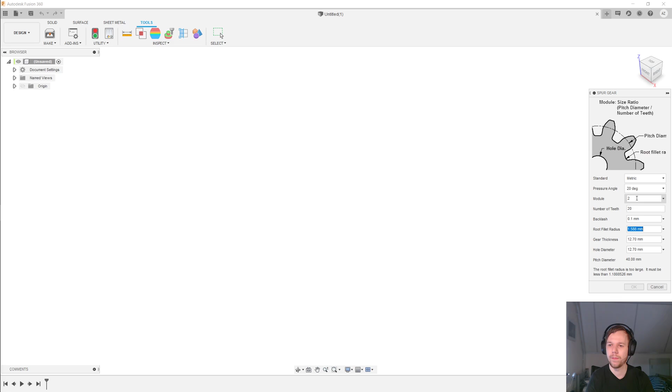Hi, in today's video I would like to talk about helical and herringbone gears. And to start, I'm first going to create a regular spur gear. So you've seen how to do this before. And there we have a spur gear.

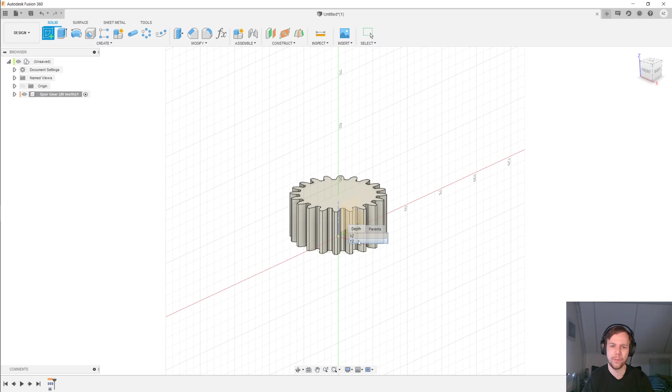I'll now activate the new component that I've got. I'm going to create a sketch, and I'm going to put that sketch on one of these two upright planes. And if you're having trouble selecting them, you can left click and hold, and then this dialog pops up and you can easily select either of the two. I hit P for project, and I project the top plane of the gear into my sketch. Reset the view via the view cube.

L for line, and I'm just going to draw a line floating out here. I'm going to take the end point of the line and make that coincident with the projected line. And I'm also going to make the line itself coincident with the origin. Now, you could have made a midpoint constraint as well, but because this projected line consists of all these line elements, you may end up having your line slightly off kilter. The final thing is D for dimension, and I'm going to make this gear 20 millimeters tall.

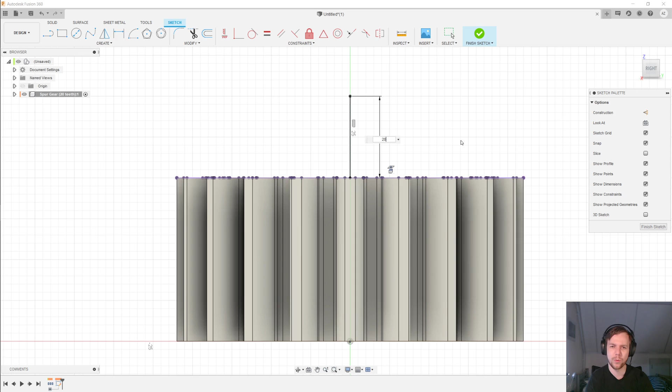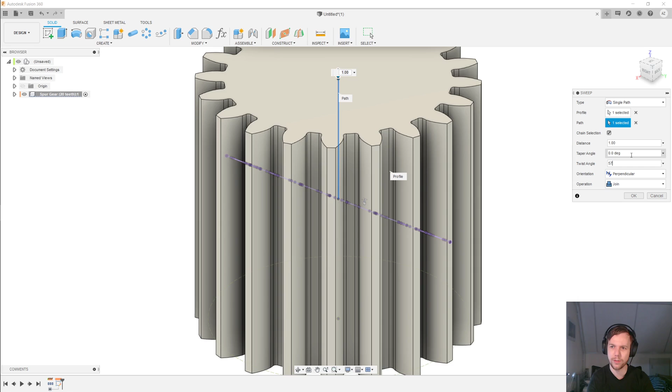Finish the sketch. And then under Create, we go to Sweep. The profile is the face of this gear. The path is the line that we made. And then under the twist angle, we are going to enter 57.296 degrees. And I'll explain where that angle comes from later. And then under the operation, we are going to select New Body.

And then click OK. And then if you open up the component here, you can see these two bodies. And so we can take the original body and remove it. And there we have a helical gear. From here you can use all of the techniques that I've showed you in video 1 to attach this gear to a shaft. And you can use all the mathematics from video 2 without any changes.

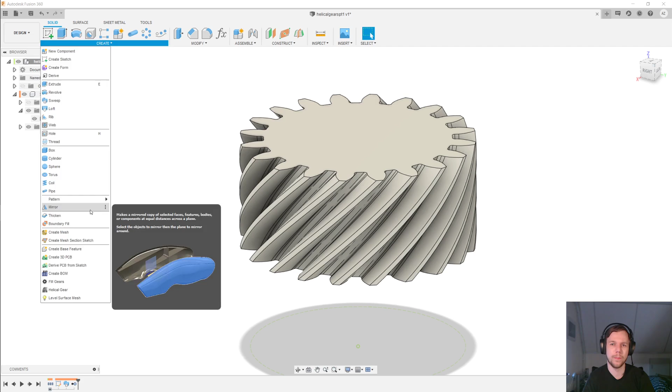What I'd like to do now is turn this gear into a herringbone gear. And to do that, we will go to Create, Mirror. We are going to mirror a body, specifically this one, and we are going to mirror it across the top face of the gear. And then click OK. And there we have basically a herringbone gear.

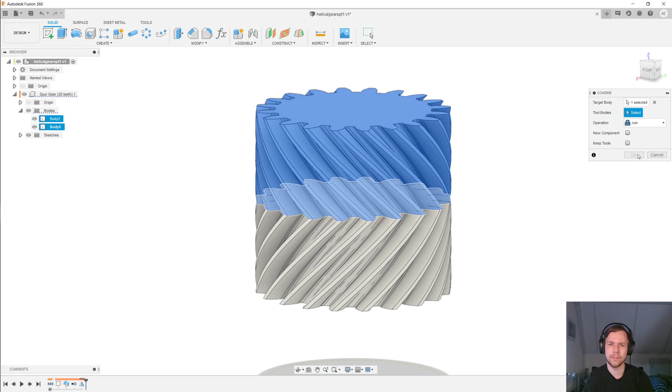But if I look now under my component, I see that I have two bodies. So I'm going to Modify, Combine, click both of the bodies. And once this is computed, that will join them up, Operation Join, into a single body, and that completes the herringbone gear. And this is in general a very convenient way of making symmetric objects. You just make one half and then you mirror it across a flat face to make the other half.

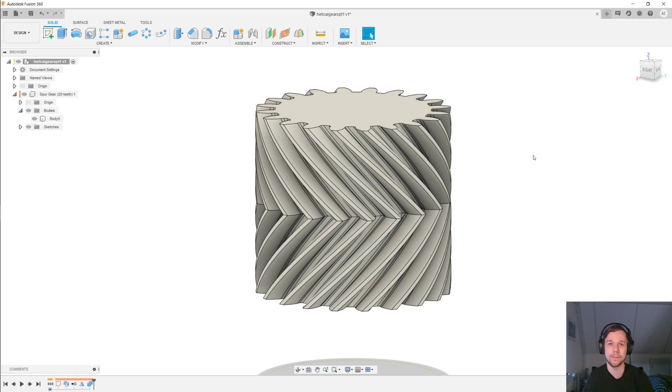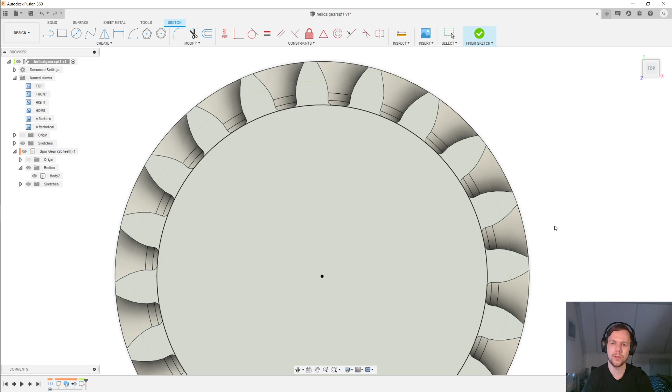I want to go back a few steps and show you something different. So I'll select the Combine and Mirror on the timeline and press Delete. And what I'll do now is create a sketch on the top surface of the gear, C for circle, and I'm going to make this circle as large as the inner diameter of the gear. Finish the sketch, E for extrude, and let's pull this up by 10 millimeters.

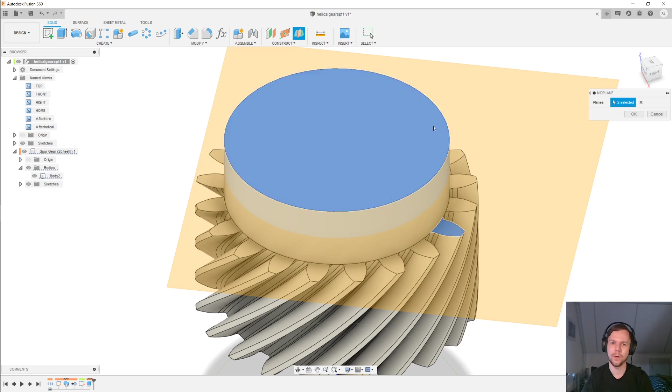And then I'm going to construct midplane, which I use so often that I have it pinned to my bar. And I'm going to put it between the end of the helical gear and the top of this cylinder. Click OK. Then Create, Mirror, as before. I'm going to take this body and mirror it across the plane that we just made. And then Modify, Combine, as before, the two bodies. Join them and click OK.

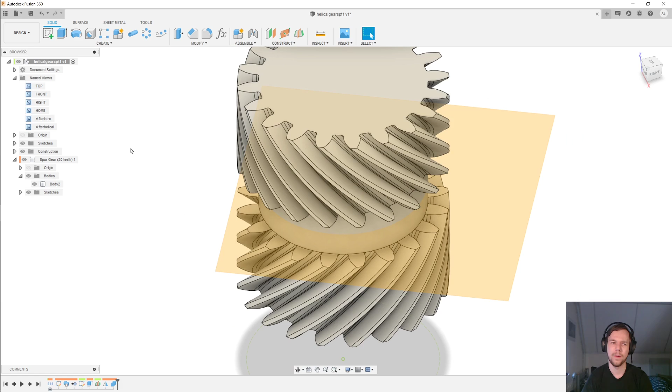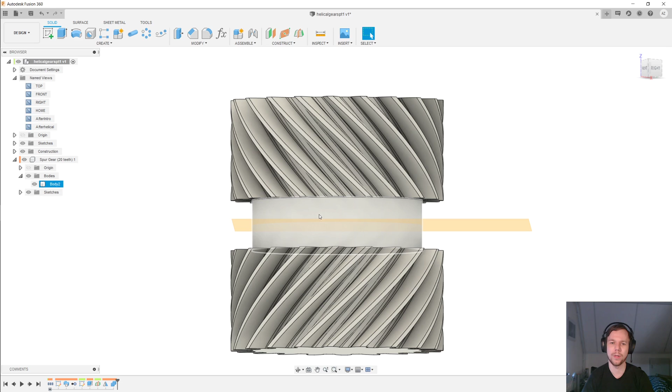And so this is basically the same thing as we had a moment ago. But instead of the two helical gears really meeting tip to tip at the center, there is this space in between. And this is known as a double helical gear. And I'll go into the reasons why you would want a double helical gear instead of a herringbone gear later on. Let's first take a look at that angle that we put in the sweep command.

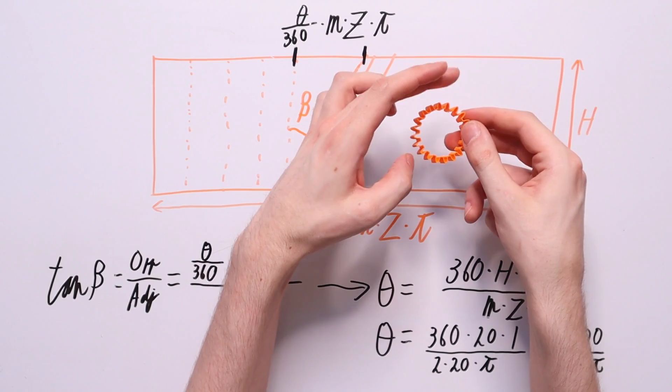Imagine you take a gear like this and you cut it open and then you lay it flat like this. What you then have is a rectangle, and the long end is equal to the diameter times pi, the circumference of the circle.

And in this case, it's specifically the pitch diameter times pi, which is also equal to the module times the number of teeth times pi. In a regular spur gear, the teeth would go upright like this, but in a helical gear, they will go off at an angle. And that angle between the helical teeth and upright is beta, which is the helix angle.

Now, these helical teeth cover a horizontal distance, and that horizontal distance is equal to this expression over here. So it's theta over 360 degrees, and theta is that angle that we put into the sweep command. And this part essentially represents how much of a complete revolution the sweep has turned. And then these three numbers are simply the circumference of the circle. So it is how much of a complete revolution have you made times how long is a complete revolution.

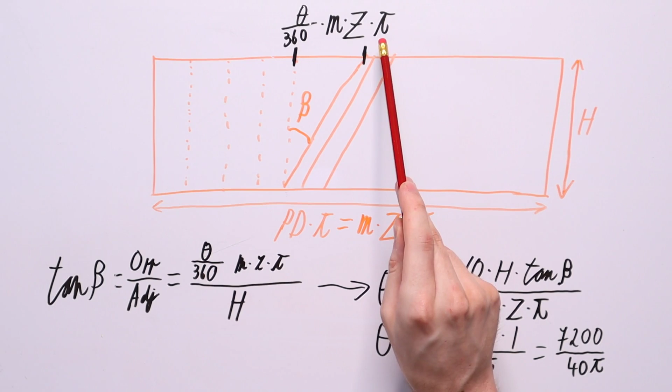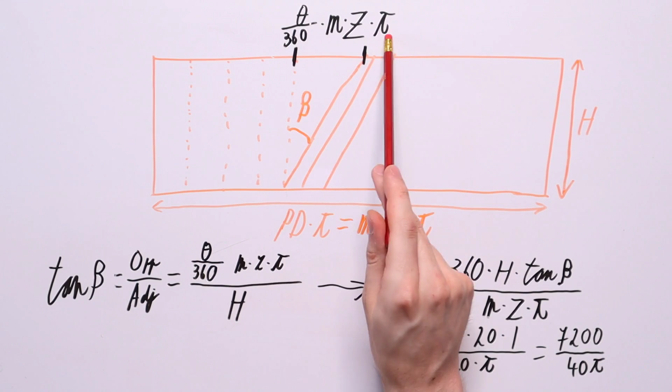So if you remember your high school trigonometry, you will know that the tangent of beta is the opposite divided by the adjacent, which is this expression over here, this horizontal bit, divided by the vertical bit, which is simply the height of the gear. But this gives us beta if we know what we put into the sweep command, but we want that the other way around, so we need to rewrite this.

This is fairly straightforward. You multiply both sides by h and by 360, and you divide by module, number of teeth and pi. And what you get is that theta is equal to 360 times h times the tangent of the helix angle divided by module, number of teeth and pi.

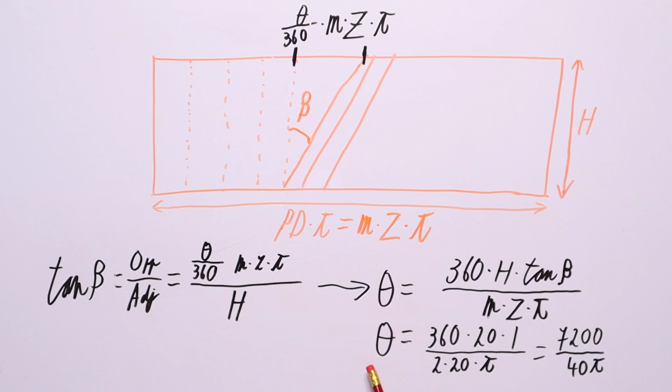And in the specific example that I did a moment ago in Fusion 360, I had a helix angle of 45 degrees, and the tangent of 45 is 1. So we get 360 times 20 times 1 divided by 2 times 20 times pi. And that is equal to 7200 divided by 40 pi, which is a little bit less than 60, aka that 57 and a little bit degrees that we put in. So that is how you get the correct helix angle, or rather what you need to put into the sweep command to get the helix angle that you want.

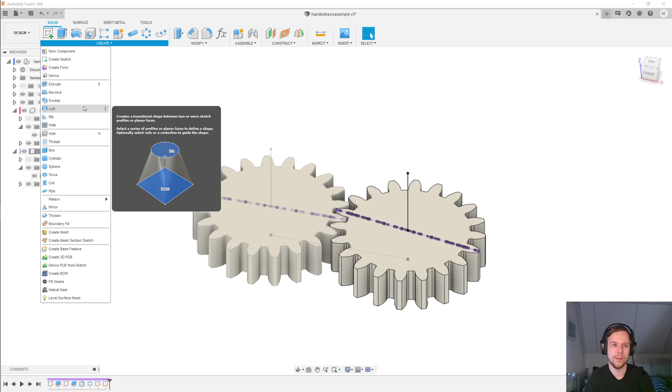I've so far entered only positive values for the twist angle in the sweep command, but you can also enter negative values. So I'll activate this component here on the right, and then create, sweep, and then I'll sweep it the same way as before with a positive twist angle of 57.296 degrees. And as before, the operation will be new body.

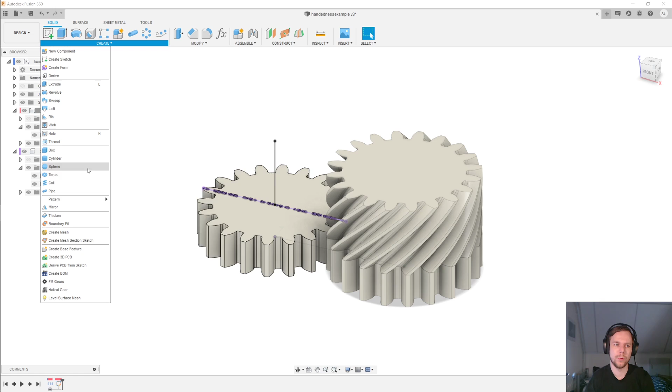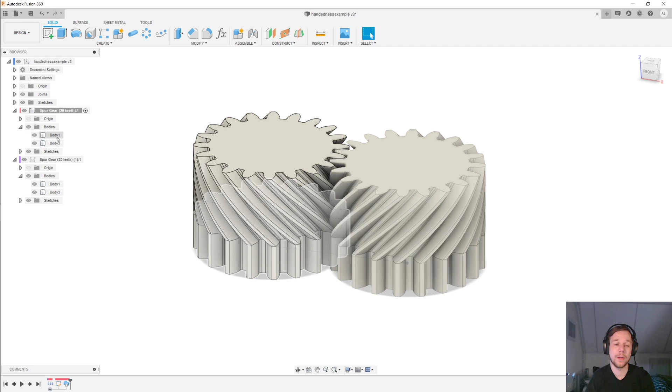And then on the other gear, I will do the same kind of sweep, but this time I will give it an angle of negative 57.296. And again, for the operation we'll do new body. And then as before, I can remove the old bodies that were the spur gears themselves. And I've set up motion links between these components so that they rotate together.

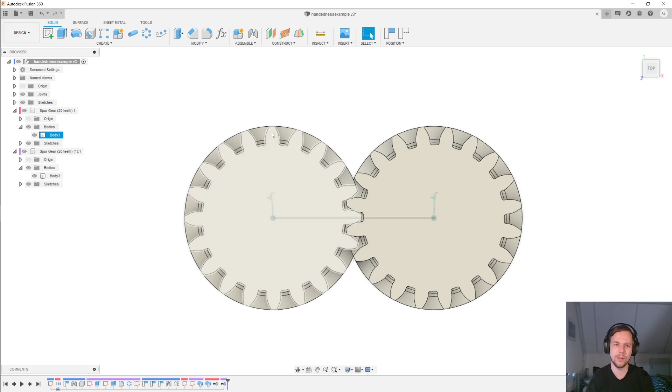And as you can see, by having this opposite twist angle, these two gears mesh together correctly. And these two gears are said to have opposite handedness. If you look from the top, you see here that these gear teeth tend to veer off to the right, and these go off to the left. And so the left gear is left-handed and the right gear is right-handed. And for parallel axes like these, you need opposite handedness in the gears. And you can achieve this by entering negative twist angles in the sweep command.

But what you can also do is mirror the gears, because the left gear here is the mirror image of the right gear. And so you can of course do that under create mirror, but you can also mirror the components, or the STLs really, inside of a slicer like Cura or Prusa Slicer.

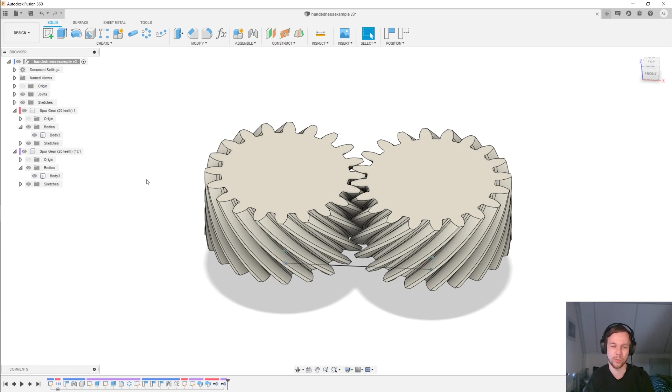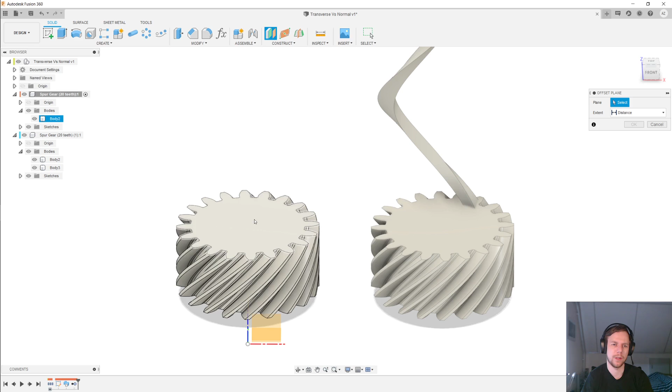There are quite literally two different ways of looking at a helical gear, called the transverse and the normal systems. I'd first like to show you the transverse system, which is essentially what we've been doing all this time. So for this, I'll activate this component on the left and create an offset plane, and I'll just drag that down some random distance. And then I'm going to split the body, so modify, split body. Split this thing along this plane.

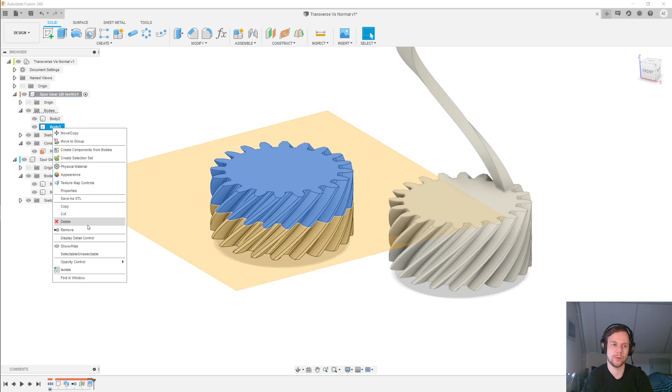And then I have these two bodies, and then I'll just remove the top one. And then if we look at the section that we've just made, we have essentially just another section of the spur gear that we've started out with. So this is kind of a natural consequence of how we modeled these gears in the first place.

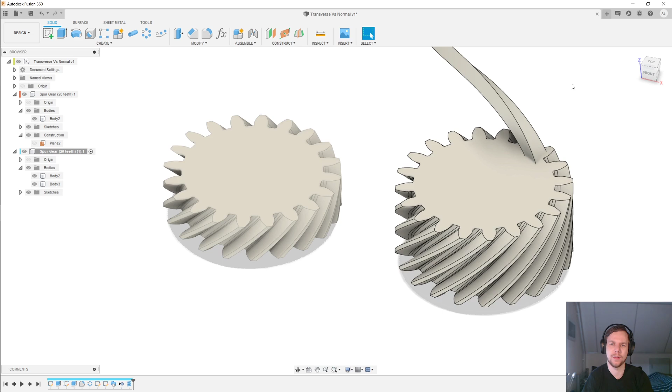But let's now look at the normal system. So I'm going to activate the other component and hide this plane. So here I have made this helix here, and I've made it specifically so that this path here follows this tooth here in the gear. And so I'll go to construct, plane along a path, and then I'll drag that to about here.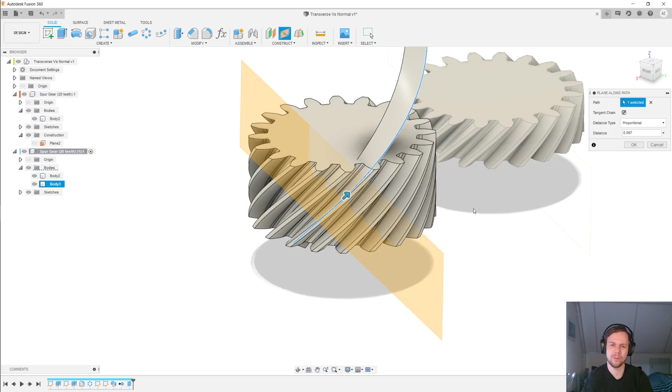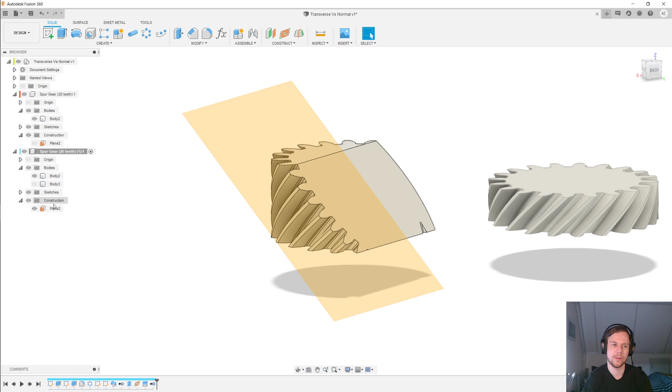And then I'll do the same thing, modify, split body, this body on this plane, and then I'll again remove the top bit, and I'll also hide the helix and the plane. And then if we look at this section here, we see that it is essentially just a spur gear, but the teeth form is a little different.

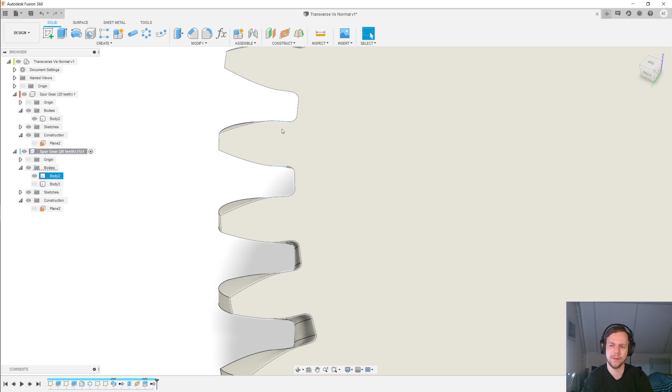So if you look here at the thickness of this tooth, roughly speaking, it's about 2.5 millimeters, you can see here. But if we look at this gear here, and we check how far these are apart, we see that it's 3.3 millimeters, a little bit more than that. And so the thickness of the teeth quite literally depends on what angle you use to look at them.

And so this gear on the right now is the transverse system with the transverse module, and this transverse module is larger for the same gear than the normal module, which is what we have here on the left. And so you can use some formulas to translate between the two.

But the most important thing is that if you're using the transverse system, then the center-to-center distance and the pitch diameters all follow the same rules that we've seen before for regular spur gears. So that's a very easy and convenient way to go. For the normal system, you have to do a little bit more math to figure out the center-to-center distance.

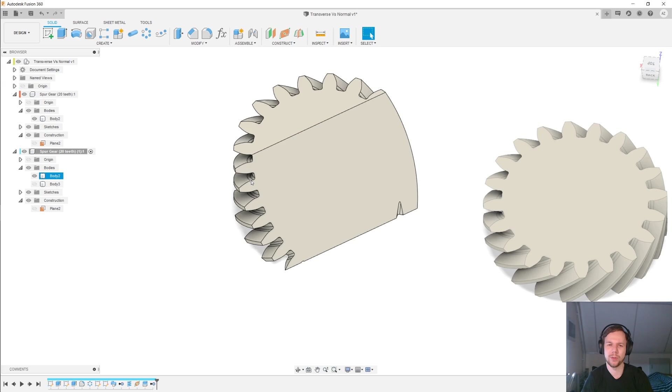The normal system, however, is very natural if you want to cut gears from blanks. And the reason is because this normal system, this path here along this helix, is basically the path that you have to push a gear cutter through a blank to make a gear like this. So you will find that most commercial gears actually follow the normal system, which is arguably a bit inconvenient, but you can also definitely purchase gears in the transverse system.

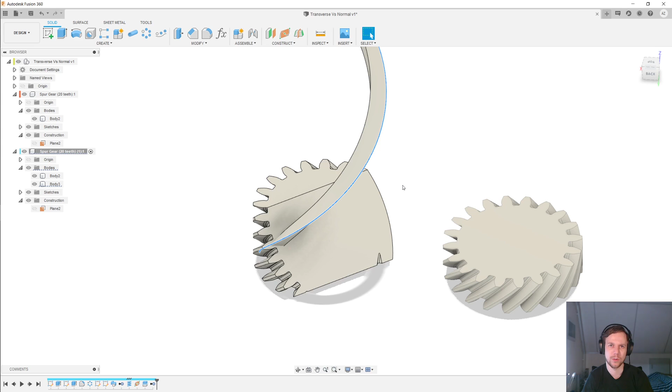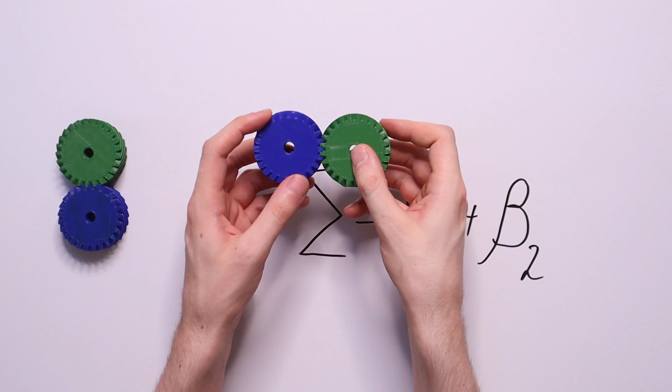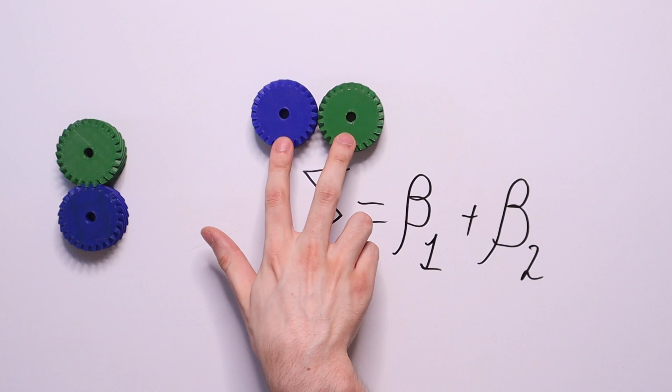As we've just seen, for two helical gears to mesh on parallel shafts, they should have the same helix angle but opposite handedness. And in general, the formula for the shaft angle sigma is that it is equal to the sum of the helix angles. And so it is most convenient really to regard these two as having the same helix angle but opposite sign. So one is plus 45 degrees, the other is negative 45 degrees. And so if I bring these two together, the shaft angle is 0.

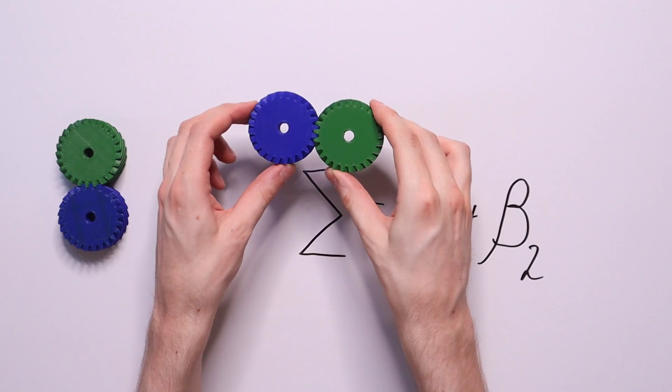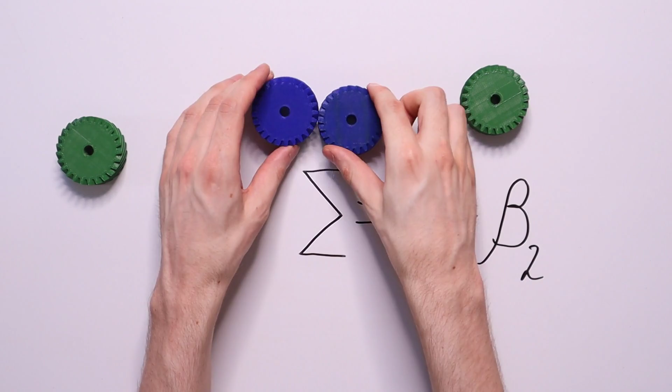But if I take another gear with the same helix angle and handedness, then they won't mesh on parallel shafts. But 45 degrees and 45 degrees is 90 degrees. So if I twist this gear 90 degrees, it goes into mesh. Now in general, for parallel shafts, if the shaft angle is 0, then you should have equal and opposite handedness, and that is your only choice really.

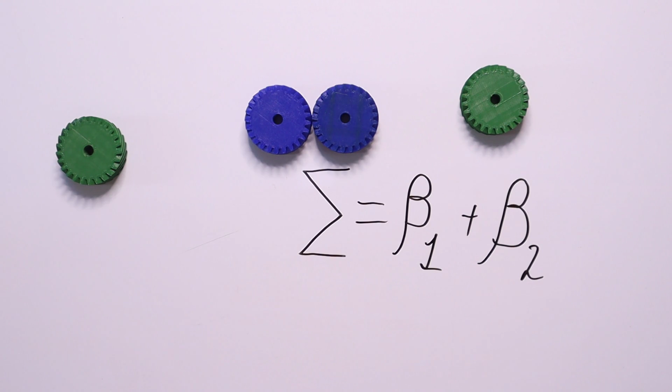But for non-parallel shafts, I recommend that you use the same beta and the same handedness for both gears. You can choose to use a different helix angle, a different beta for each gear. But in such a case, you must ensure that the normal module of the gears match. And that also means that the transverse module will not match, and you have to keep this in mind when you're modeling.

I would now like to talk about some of the advantages and disadvantages of using spur gears versus helical gears and herringbone gears. And perhaps one of the surprising parts is that there are reasons to use a spur gear besides just cost. The first thing I'd like to show you is that helical gears produce an axial force, which straight spur gears and herringbone gears do not. So let's take a closer look at this.

Here I have a set of regular spur gears, and as we've seen before, these spur gears produce a force in this direction to transmit the torque, but because of the pressure angle on the teeth, they also produce a force in this direction which drives the gear apart.

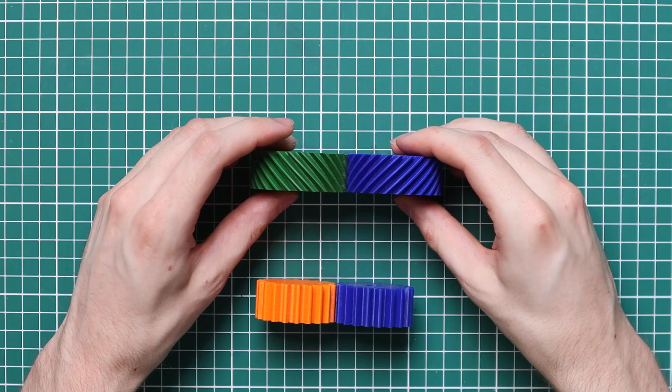Now that is still true for helical gears, but helical gears have an additional complication. The force generated by these gears is always perpendicular to the teeth because it is a normal force. And for the spur gears, that's simply in this plane perpendicular to the gear teeth. But that's still the case for the helical gears, but here the force points in that direction.

So if I drive this green gear, I will start pushing the blue gear in this direction. And because the blue gear produces an equal and opposite reaction force, the green gear will be pushed in this direction. Now that force is proportional to the tangent of the helix angle, so it'll get much more serious as the helix angle grows larger.

To hold this force, you have to ensure that the mounting method that you use to put these gears on the shaft can hold the force, and you must also ensure that the bearings supporting the shaft can hold the force. Now, regular ball bearings can take a little bit of thrust force, but if you have a very extreme helix angle or you are transmitting a lot of torque, then you must probably upgrade to something more exotic like a tapered roller bearing or an angular contact bearing.

Now for herringbone gears, they don't actually have this problem because the force generated on the top end here is compensated by the equal and opposite force generated at the bottom. So these two balance each other out so that net they don't produce an axial force like the helical gears do.

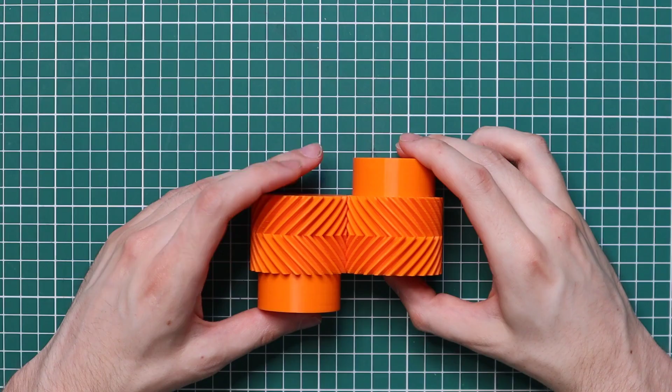But if I take a look at herringbone gears, I run into a bit of a problem. Because these two gears are supposed to mesh together like this, and that means that these two upper bits mesh and these two lower bits. But if I put the gears like this or like this, they won't go together. So if I approach the gears along the directions of the shafts, then they won't go into mesh like this because these two parts cannot mesh. And I get the same problem if I come in from the other side.

And so the only way to put these gears together is by approaching them from the sides like this. And so two things that you can do is first put them together in mesh like this and then put them on their shafts. And the other thing you can do is put them on the shafts, put the bearings on the shafts as well, and then put the bearings into the bearing housings from the side. But this does require that you have bearing housings that you can open and close from the side.

If you really want to get a physical feel for this problem, I recommend that you download and print the Emmett gear bearing. It really drives home nicely how this problem works.

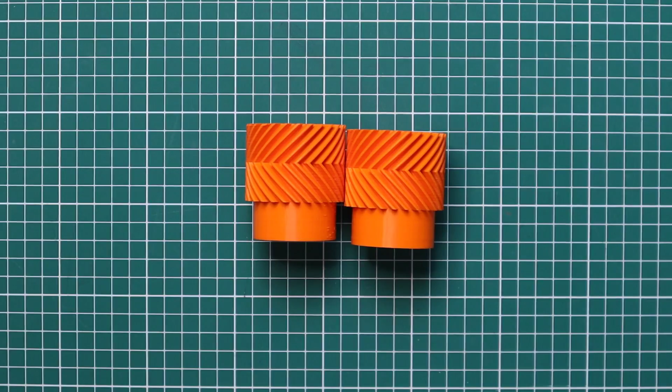The next thing I want to discuss is the handedness of the gears. So it is quite obvious now that spur gears don't have a handedness and helical gears do. But a lot of sources will claim that a herringbone gear does not have a handedness to it. And I'd like to show you that honestly in most cases they do, and you really have to look out for this.

Here I have that set of herringbone gears again, and as you can see, they won't go into mesh like this. But now someone might come around and say, well, all you have to do is turn one of the gears around. And they are correct. If I turn them around, they go into mesh like this. But my problem is, this mounting hub is now up here, and I don't want the hub here. I want it down here. And so if I want these mounting hubs in the right positions, I do have to ensure that these two gears have opposite handedness.

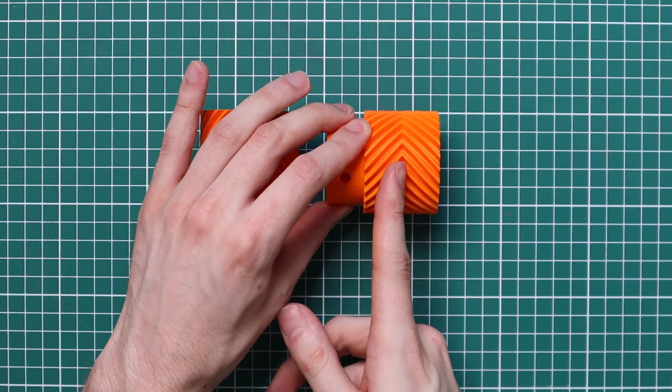And in fact, if you do anything that is not symmetric with respect to this plane over here, you will reintroduce a handedness to the gears that you should be mindful of. One of the big advantages of helical gears and herringbone gears over regular spur gears is that they have a much higher contact ratio, and because of this they tend to run much smoother.

So let's take a closer look at this. I have marked one of the teeth on both of these spur gears so that we can track them as they go into mesh. So if I rotate these two gears, then right around here the two marked teeth first contact each other. And if we look at the same teeth at the other side, we see that they go into contact at the same time. So the entire tooth goes into contact all at the same time.

And this is very different for helical gears. So if I turn these two together, then right around here the marked teeth go into mesh. And yet if I look at the same teeth on the other side, we see that they are nowhere close to meshing. So in general, helical gears spread the load that they are transmitting through more teeth. However, each tooth is only partially in contact with its mating tooth.

And how many teeth are participating in this transmission of the load is called the contact ratio. And if you have a higher contact ratio, then you have a smoother running gear, generally speaking. We've also seen in video 2 that if you have more gear teeth, then you have a higher contact ratio as well. So that is again why if you have more teeth to your spur gear, you have a smoother running set.

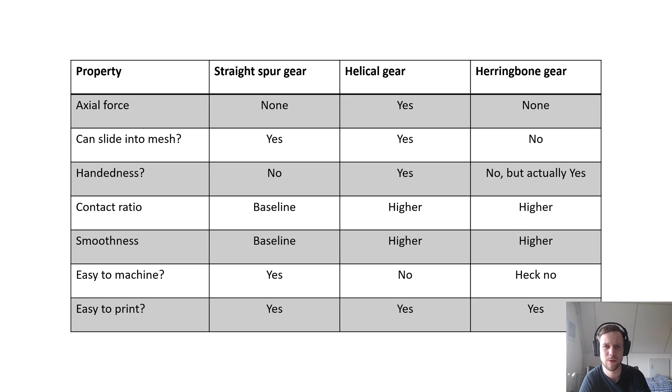Now the reason you might want to use a double helical gear is because those are still relatively easy to machine compared to making a herringbone gear. So it's easier to make two helical gears and put those together than it is to make a herringbone gear. The trade-off there is that you need a little bit of space between the helical gears to ensure that the tooth tips don't interfere with each other.

There are two more things that I'd like to show you. First is the difference between what you get from a helical gear generator and what you get from the method that I've shown you at the start of the video. So if you go to Tools, Add-ins and to the Fusion 360 App Store, you can download a bunch of add-ins, and one of the most popular ones is a helical gear generator. So once you have that installed and running, if you go to Create Helical Gear, you get this dialog.

So you can go for normal or radial system, and radial is the same as transverse, and you can enter everything else. The one thing that's missing here is the root fillet radius, which you can enter into the spur gear generator. And the other thing that is a bit annoying about this generator is that if you go for a low number of teeth, then it says that undercut is required, which is true, but it doesn't create the undercut for you. So you cannot create gears with a very low number of teeth because you don't get the undercutting that you need.

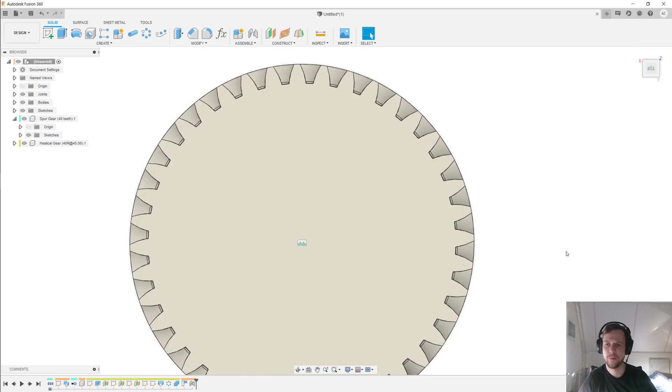Nevertheless, if you do make a gear with this, I have made two here. So one is based off of a spur gear using the method that I've shown you before, and the other comes out of a helical gear generator. So if we look at these two in detail, we see two slight differences. So the first difference, well, first let's notice that the teeth, the shape here is completely the same, and we'll see that that's really true in just a second.

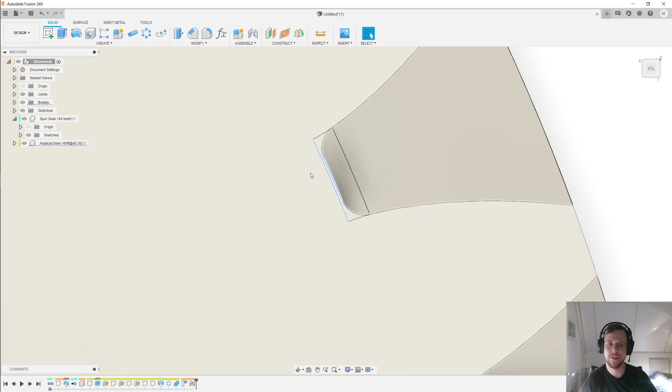But here at the root of the teeth we see two slight differences. First, we see that the inner diameter of the two gears differs by about 0.05 millimeters. And second, we have this root fillet here that is part of the spur gear based gear, but is not present in the helical gear. So if I hide this one, you see that there is no root fillet here.

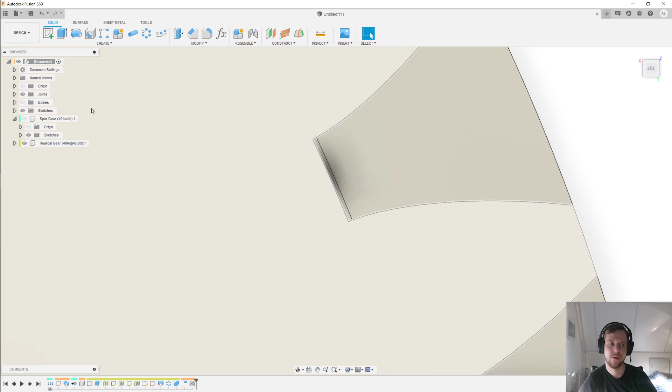So if I put this back, I can go to Modify, Combine. And we've used this before to join two bits together, and what we're going to do now is cut two things away from each other. So I'm going to take the spur gear based helical gear, and from that I'm going to remove the helical gear from the generator. So here we can see all of the parts that are in the spur gear based gear, but that are not present in the helical gear generator based gear.

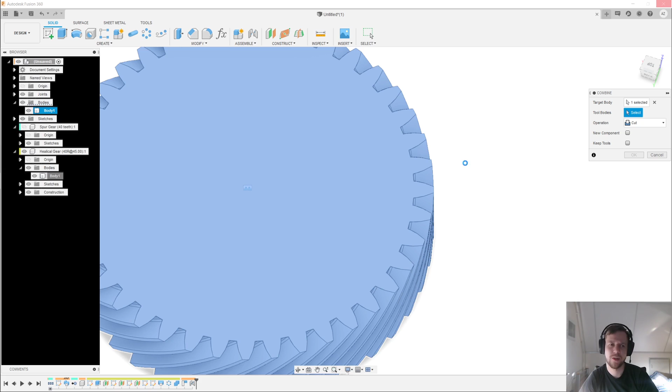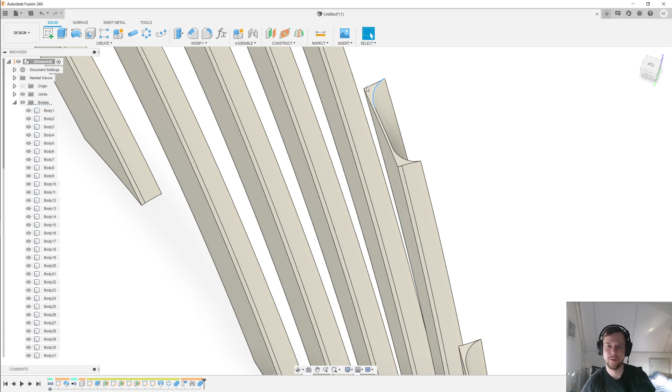So this takes a little while to compute. This is fairly complicated geometry. And we press OK. A little bit more waiting. And here we have the difference. So what you can see is this little part here, again, this difference in inner diameter and the presence or absence of the root fillets. But there is nothing here of the teeth themselves, so the tooth form is exactly the same.

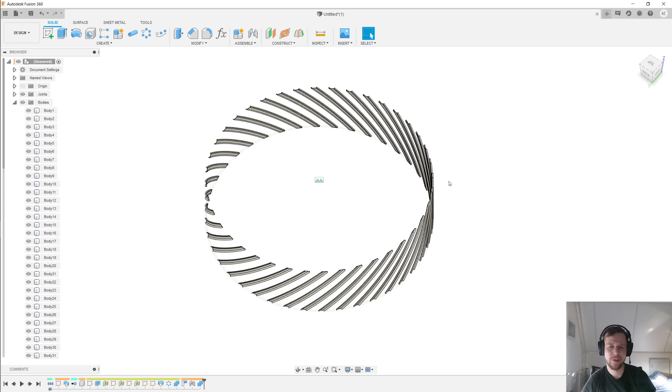So that is the difference between the two, and both of these methods will work fine for generating a gear. The root fillets do add a little bit of strength to the teeth, but the difference isn't that large.

I hope you found that interesting and useful.